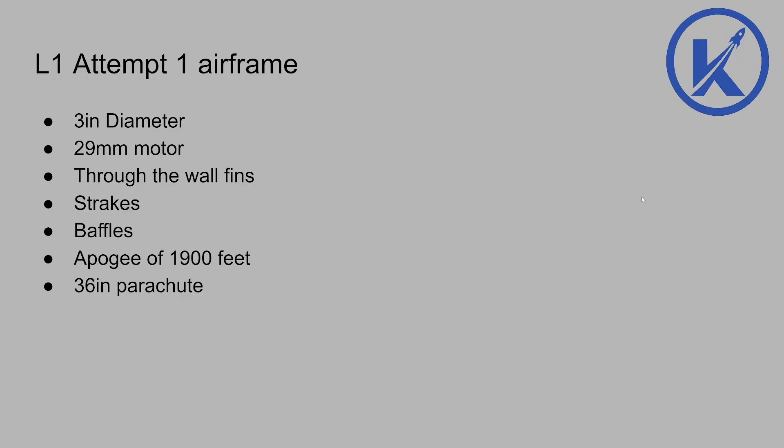Had through the wall fins, also had strakes. We were running a baffle system as well as a parachute protector. We were running a Nomex blanket around our parachute. Had an apogee around 1900 feet, and it had a 36-inch parachute. Now, the results. We had a very nominal launch. Parachute deployment went very well.

Now, the high level winds on this day were pretty high. We were looking at about 20 miles per hour plus. Ground winds weren't too bad, we were at about 10 miles per hour. And this thing, as you can see, sailed off into the sunset, was not recovered.

The launch, I will say I don't have a great recording of it, but I will put it in here in a moment. The launch went okay. We had a really good launch off the pad. It was beautiful. It reached apogee. The winds were so high, it just kind of sat there. It just coasted in the air.

And I kept this 14-second delay because I knew the winds were high, but not as high as I anticipated. And, well, it was kind of just floating up there. The 14-second delay did kind of what I wanted it to do. The plan was for it to fall a couple hundred feet before it deployed the parachute to at least try to get under some of the wind. That didn't go as planned. It kind of just sat up in the wind and deployed the chute.

And it coasted under chute for a long time. It ended up across the street from the launch site in the woods. I went looking for it immediately with the best bearing I had at the time. I searched for about an hour, didn't find it. Packed up my stuff so I could go search some more, and I got a new bearing from someone who was closer to where it went down.

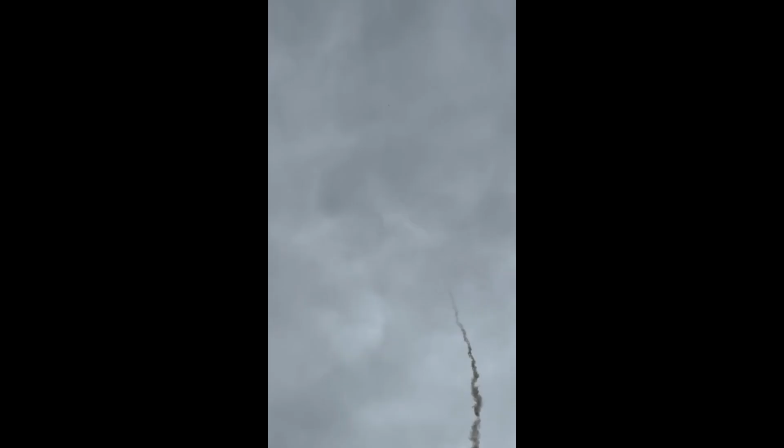So right here, guys, you see we had a really stable launch. Everything looked good, and here in a moment, it's going to go out of frame. I didn't record this. My brother was recording so I could watch my flight more, and you'll see it deploy slightly after he loses frame, and then it'll pick back up here.

Yep, I still got it. It's a long delay. Woo!

Chute's out. I'm just gonna pop in here, guys. So we see the chute's deployed here, and as we can tell, it is very high up right now, and that wind is just taking it. It is blowing way up there, and it's just carrying it. And at moments, this thing felt like it was being lifted by the wind, not just being carried, just straight up lifted.

So we're just following it here for a minute, and here in a moment we'll see it go down below the trees, and we'll swap over and we'll take a look at how the recovery went.

Looking at a map here. But I think it's just going to be over the street. Thinking about 20-30 seconds, you'll see it over Webster Road. Fall below the tree line. There it is. From our perspective, it is not where it actually ended up. Wow. So, do you have any kind of location? So here we go. We're getting on it? Close to the tree line here.

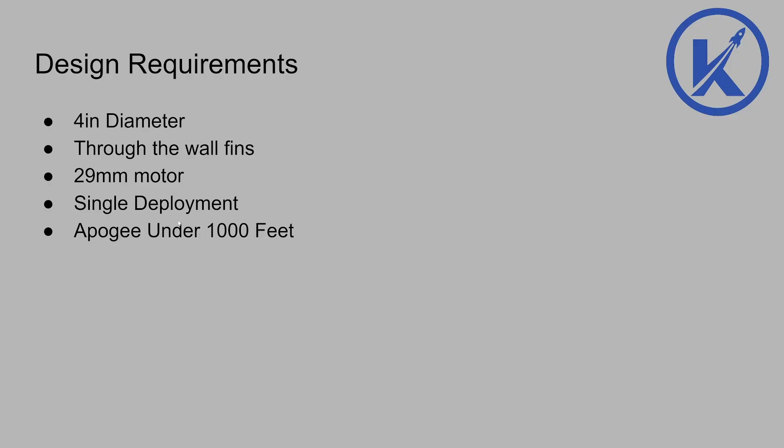So our design requirements: we're running a 4-inch diameter. We're going to do through the wall fins again. We're going to do a 29mm motor. I'm hoping to launch it on the same motor, an H115DM. We're going to shoot for single deployment. That is the goal, and keep an apogee under 1,000 feet. So let's move over to the rocket file.

Alright, so this is what I have started so far, guys. We're looking at an overall length of 135 centimeters. We might boost it up a little bit, just get some more mass in her. Our stability is good. We got 1.33 cal. That's right where we kind of want it. Between 1 and 2, closer to 1 tends to be a little better.

We're not going too fast. Max velocity of 258 feet per second. And our apogee, this is the key here, 997 feet. We're under that 1,000 feet. If needed, I will probably add some ballast in this thing, and we'll get some more accurate weights as we get there. The last rocket had technically 8 fins if you include the strakes.

This one we're going 3 fins. I'm gonna do these out of basswood. I'm just gonna cut them out, and I'll be using my 3D printer to get a cutting jig put on here. We'll cut these out, put them in once this first motor tube is in, hopefully. We'll cut first and then do the motor tube so I can align it better.

But we'll do this motor mount tube. We'll do the first 2 centering rings. I still have to put rail buttons in here, but we're just going to use some 1010 rail buttons. This was the closest shock cord I had here in OpenRocket. We're going to probably run some 750-pound Kevlar. Totally overkill, but I don't care.

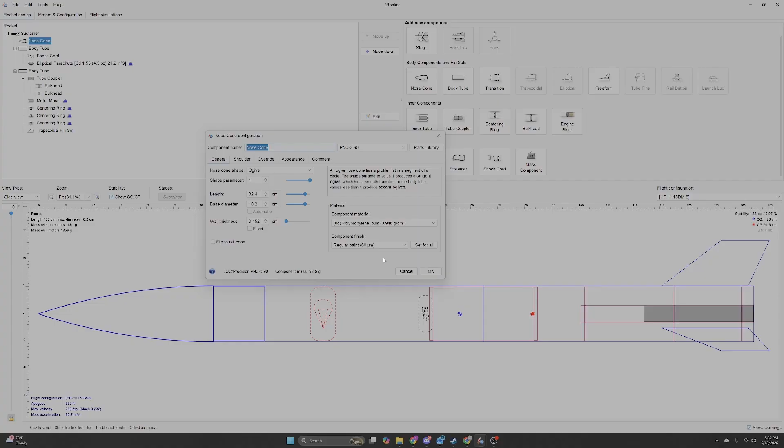This is, I think this is an ogive, yep. We're using a PNC 3.9. I'm pretty sure it's a LOC Precision. Yeah, it's a LOC Precision nose cone. Most of the parts are coming from LOC. We're just using some thick walled tubing, that kind of thing. I think it'll turn out pretty well.

I'm hoping to launch here in July. It's a ways out. This rocket actually won't take me very long to build, and we'll do some videos on the building. But I am pretty filled up during the launch time that is in June, because I just launched over this past weekend of recording this. And we're going to move on to looking at July. In June, I'll be launching.

I am a college student, and I do compete on a rocketry team, so I'll be launching down in Texas at the International Rocket Engineering Competition. And so somehow I'm trusted with an entire avionics and recovery system, but I can't even land my own L1. But that's where we're at right now. And then we'll move on here and look at some of the future projects that I kind of have in mind.

All right, so moving on into some future projects here. This isn't totally perfect quite yet, but at the moment we're looking at this rocket here. It's called Cerberus Mark II. Cerberus Mark I actually flew about a year ago. It was my first attempt at building my own home-built avionics bay with my own flight computer. It was running on a Pi Pico 2, and it went pretty well.

The launch, I did not recover. There was a failure in the motor ejection. The powder didn't fully ignite. There wasn't enough pressure on the ejection charge, and it didn't deploy the chute. It was all built-in ejection charge, so there's nothing I could really do there. But besides that, it actually went pretty well. Launch was good. The launch rail angle, everything was beautiful. It was just a failure to deploy chute.

It hit the ground ballistically, and it was kraft paper, pretty thin kraft paper, and if anything survived, it would have been the fin can, but I even doubt that. It was ASA, and I did the math, came down with about 8,000 joules of energy. That thing wasn't surviving. It is now one with Mother Earth. But now we've got Cerberus Mark II.

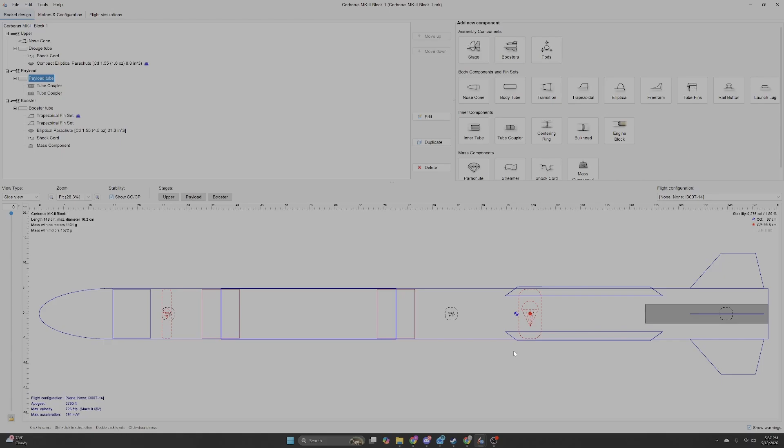And let's move over to the CAD and I'll explain some more. So here's the CAD model of Cerberus Mark II Block 1. At the moment, there have been some changes. The modeling is still getting up to date at this time, but I'll show you what's changed, what's staying, so on and so forth. So let's do a little chop in half here.

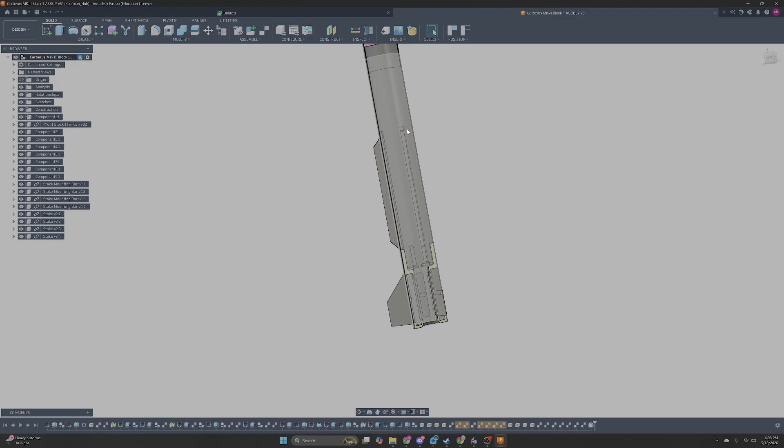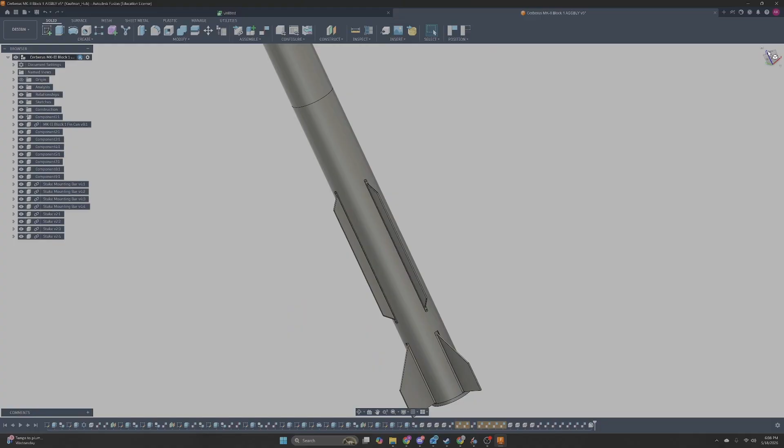So we got the fin can down here. You'll notice there are these big poles here. These were used for mounting the strakes originally. Those are actually going to go. And since then, we've also rotated the strakes 45 degrees off center with the original fins there at the bottom. And so I still have to move those and so on and so forth. Oh, this is the one thing I don't like about Fusion, but we'll get past that. All right. So that's changing.

The way it's changing is here. Let's go from this angle here. So as you can see, these new bars that are up here, they'll be able to house this bottom hole for the mounting screw. And we'll be using heat set inserts for that. And then up here, we're going to have a separate kind of top cylinder, similar to the setup of this here. It's going to be fully hollow in the center so we can pass a shock cord through it. But that'll house the upper mounting holes for the strakes as well.

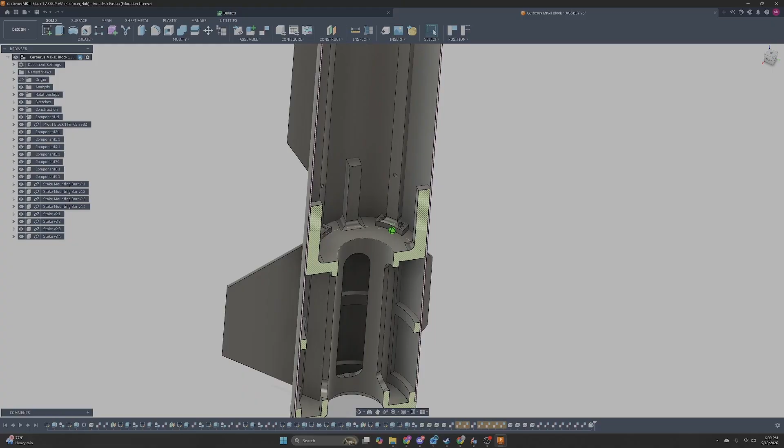Now, to connect the two other than the strakes, because I don't want the strakes being the only connection between these, I'm going to put, in place of these bars here, some small carbon tubes that are going to run from here to there. This way we get a more solid inner structure that hopefully, because everything's being screwed in on this fin can, I can remove the outer screws and just slide out this entire internals.

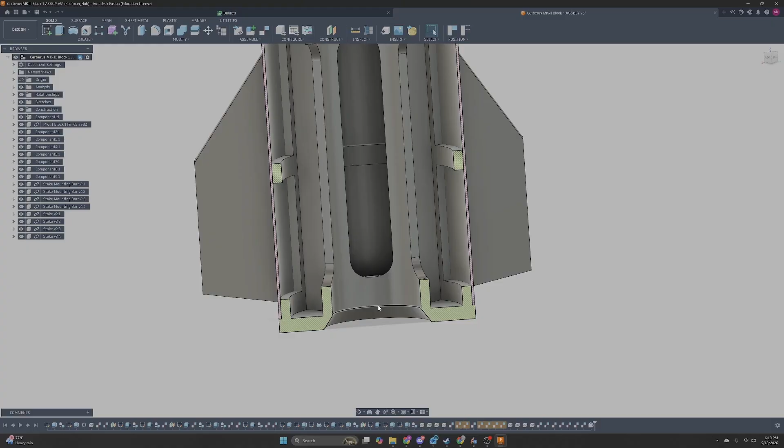Now, when we're talking about the modularity of this thing, you'll realize that this isn't the largest size we could go motor wise. Actually, most motors will extend out the top of this. So there's some plans in the works to have almost stackable sections down here for larger motors, just to add the stability there. And you can't really tell, but this is a little wide for a 38 millimeter motor. We actually have some insulation sleeves that are made out of nylon carbon fiber that slide in here, and the motor slides into that. And then there's a motor retainer that mounts to the outside and screws up through the bottom of the fin can.

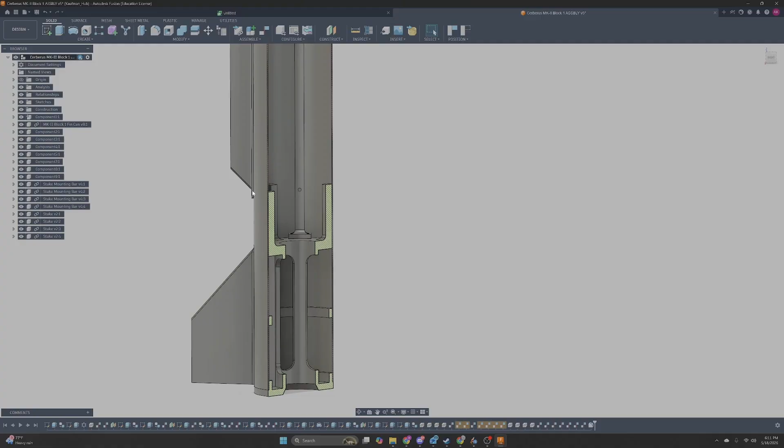And you'll see here as well that the bottom of the rocket, the body tube, rests on this surface here. So the force of thrust goes through the fin can. You'll get some transmittance through the screws for the strakes, but that's not our primary mode. It's mostly this bottom surface here. We're going to be pressing up against this surface here off of the sleeve, and then that force is transferred up through the body tube. And there will be screws on the outside holding this in. I just haven't modeled them yet.

Moving up here, we're getting towards the section that is our avionics bay. So this section here is generally going to be our untouched section. It'll change with flights, obviously, because we're going to be moving into active control on this lower section, and we can design different levels of payload. The idea, though, is that we can have maybe a couple different boosters. One's on an H motor, one's on an I motor, whatever. We could always swap the booster and we could fly it.

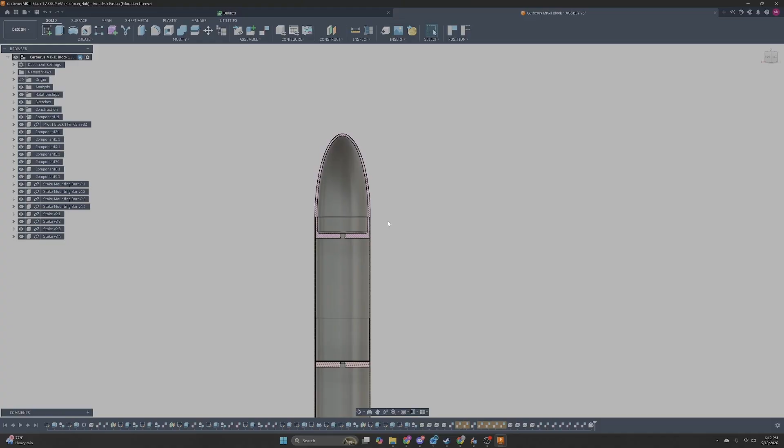Then up here is one of the parachute bays. Maybe in our nose cone, because our nose cone will be printed, we can look into some custom stuff in terms of cameras and things of that sort. Maybe a scientific payload up in the nose cone. We can do all sorts of stuff. But this kind of gives us a platform to work with.

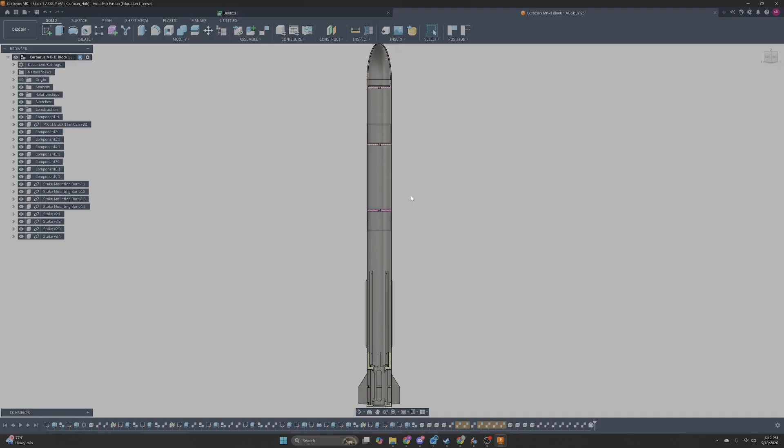Block 1 is meant to mostly be a testing platform. Test if the designs of the booster are going to work well, if they can hold up, if my computer is working well, mostly to get our first set of data for the new computer and see how it's reading out, that kind of thing. Do all sorts of testing on this platform.

And then as we move forward, block 2, block 3, block 4, we'll just see systematic improvement there and just slowly break it down. And as an engineering student and someone who does collegiate rocketry, we will be breaking this down as we really get into it past our L1 cert here. We'll be doing some systems engineering and breaking down that whole process, especially when we get deeper into the Cerberus platform here.